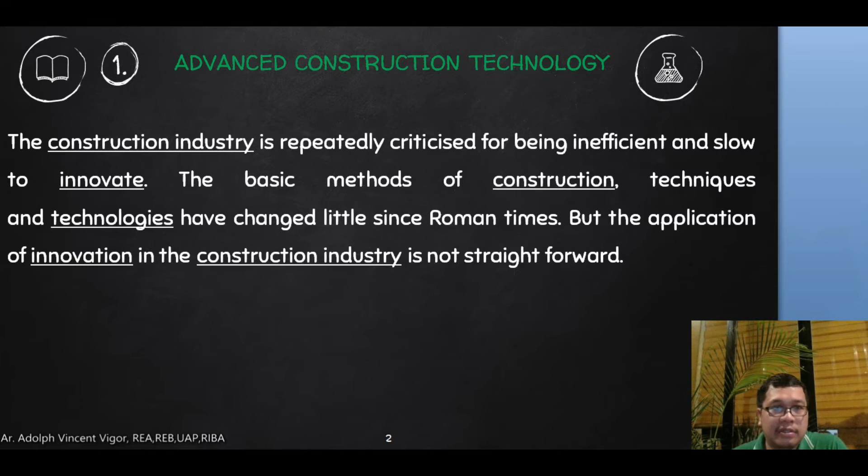Every construction project is different. Every site is a singular prototype. Construction works are located in different places and involve the constant movement of personnel and machinery. In addition, the weather and other factors can prevent application of previous experience effectively.

So what this means, class, is that each and every project is unique. Building a project in a certain location doesn't mean the factors are the same as a different location, because every site is different. There might be a difference in topography, in how you source materials, in weather conditions, and also in soil conditions.

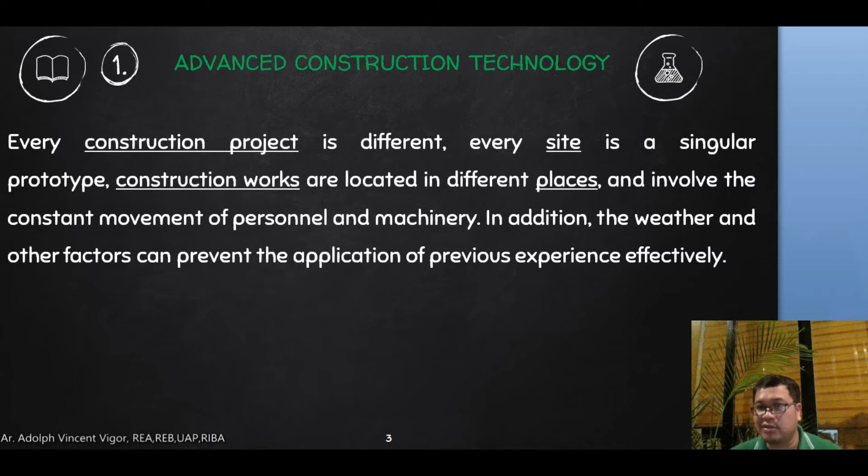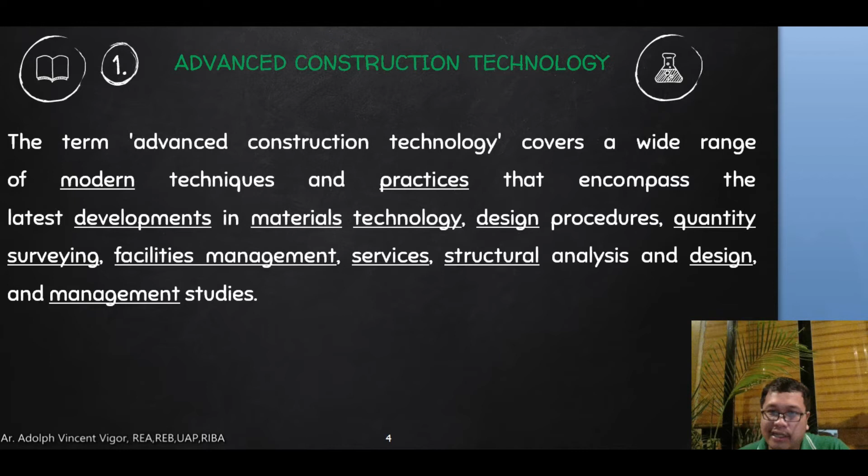The term advanced construction technology covers a wide range of modern techniques and practices that encompass the latest developments in materials technology, design procedures, quantity surveying, facilities management services, structural analysis and design, and management studies.

Incorporating advanced construction technology into practice can increase levels of quality, efficiency, safety, sustainability, and value for money. However, there is often a conflict between traditional industry methods and innovative new practices, and this is often blamed for the relatively slow rate of transfer within the industry.

Can you think, class, why there's a conflict between traditional industry methods and innovative new practices? For me, I think the reason is that those who are already used to traditional industry methods have a hard time adjusting to different methods. I think this is the primary reason why there is a slow rate of technology transfer in our industry.

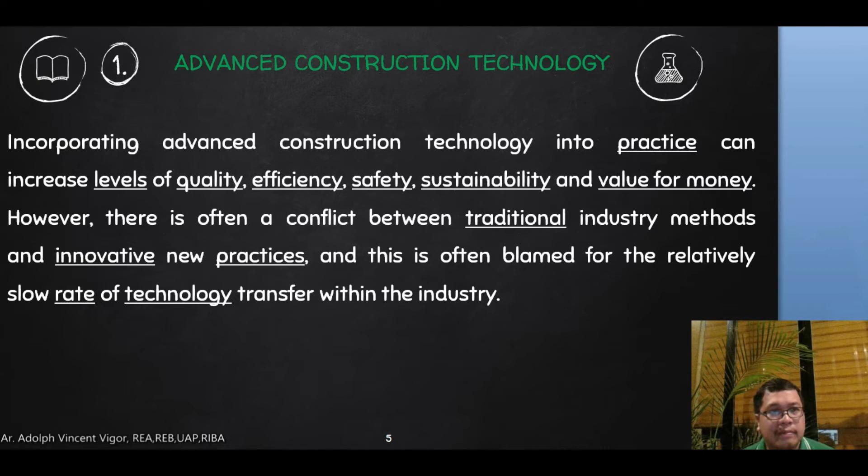The adoption of advanced construction technology requires an appropriate design, commitment from the project team, suitable procurement strategies, good quality control, appropriate training, and careful commissioning.

This means that when you design something, class, you have to take into account what appropriate construction technology you're going to use. Make sure you already have an idea in mind when you design. Then, of course, it requires commitment from the whole project team. If they're not committed to using that particular technology, you're going to have a lot of resistance which will hamper your progress. Then you need suitable procurement strategies, because some materials might be available on a certain site but not available on another.

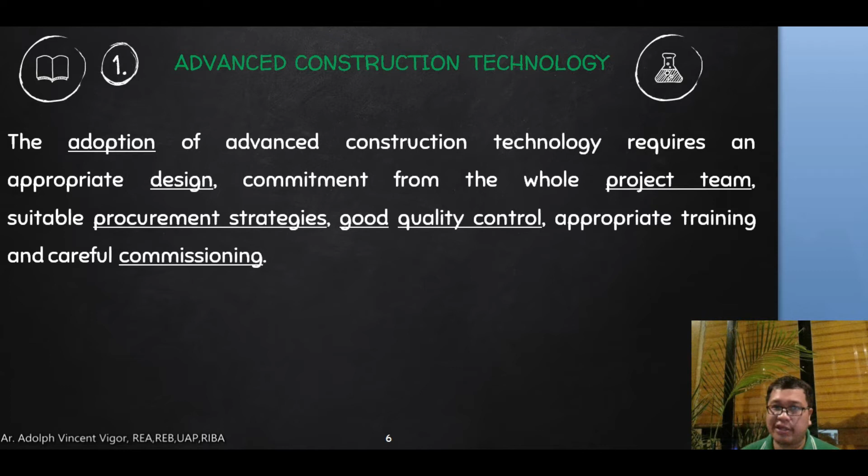Then you have to have good quality control, appropriate training, and careful commissioning.

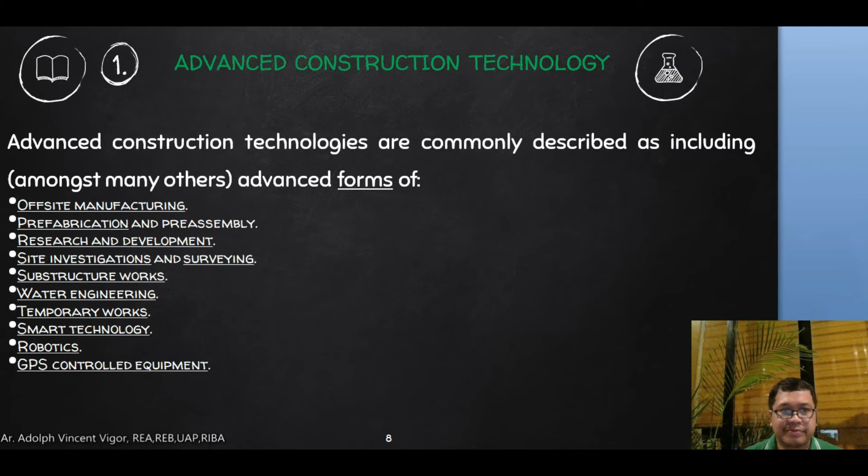Advanced construction technologies are commonly described as, amongst many others, advanced forms of 3D printing, materials, building information modeling, cladding systems, computer-aided design, computer-aided manufacturing, computer numerical control, construction innovation hub, construction plant, modern methods of construction, modular construction, off-site manufacturing, prefabrication and pre-assembly, research and development, site investigations and surveying, substructure works, water engineering, temporary works, smart technology, robotics, and GPS control.

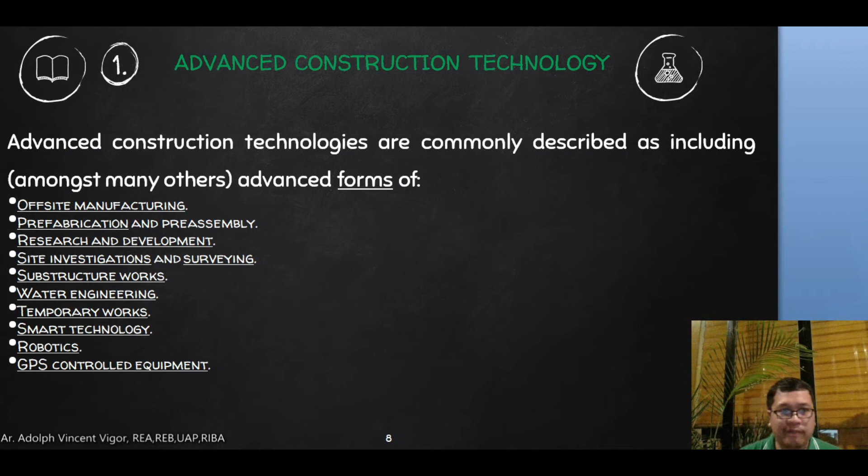When you use 3D printers, class, I think it increases your creativity also, and the kind of structure you're going to produce, because human workers have limitations with their skills. But if you use 3D printers, since it is guided by technology and robotics, it will be easier to do more complex shapes, which gives you more creative freedom, and you can create shapes that are impossible to build with human hands.

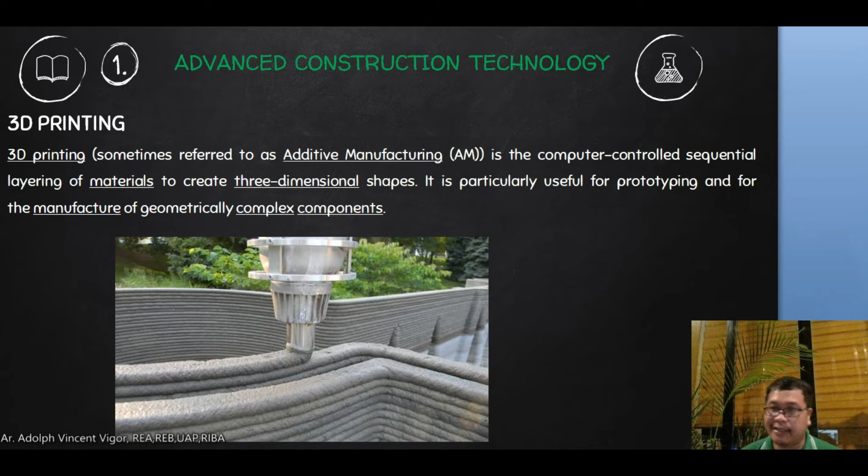In the construction industry, 3D printing can be used to create construction components, so you can print different components or print entire buildings. I've heard that in China they're able to print entire buildings. This is something I hope will be adopted in our country as well.

Construction is well suited to 3D printing, as much of the information necessary to print an item will exist as a result of the design process, and the industry is already experienced in computer-aided manufacturing. The recent emergence of building information modeling in particular may facilitate greater use of 3D printing.

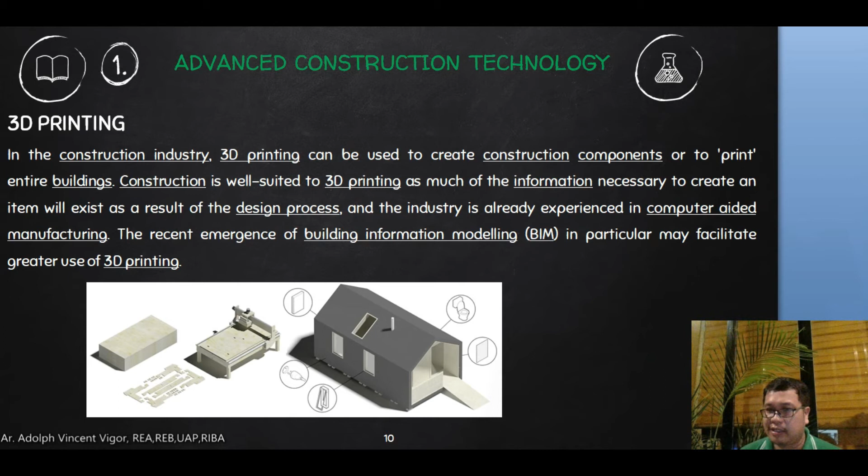Since you're already in your third year, you're already well versed with computer-aided design, drawing, and drafting technologies such as Lumion, AutoCAD, and 3ds Max. When you talk about BIM, you use information to build your building. So when you design the building, you could already generate its project management data, generate the bill of quantities, the bill of materials, and your drawing sheets, which is really great. I think that is the future also, and it would make planning more efficient and more accurate.

You also have this term, which is cladding. I think a lot of you are already familiar with it. This example class is a building in Riyadh, a library building. I've seen it once, twice, or thrice when I went to Riyadh a few years back.

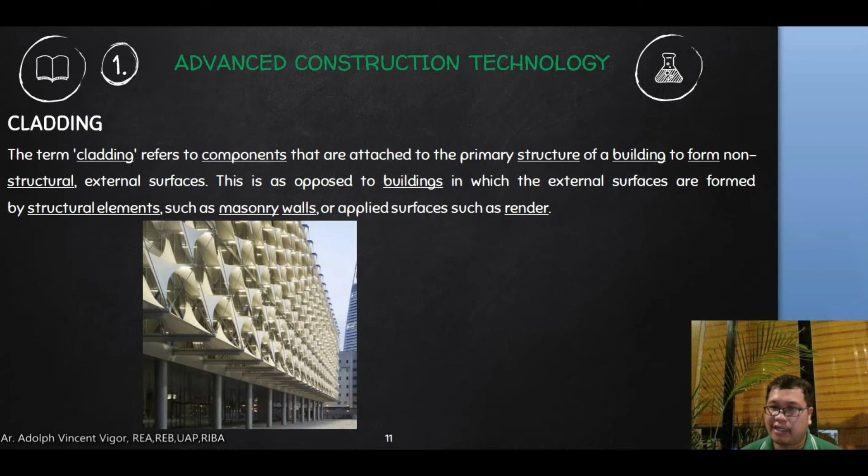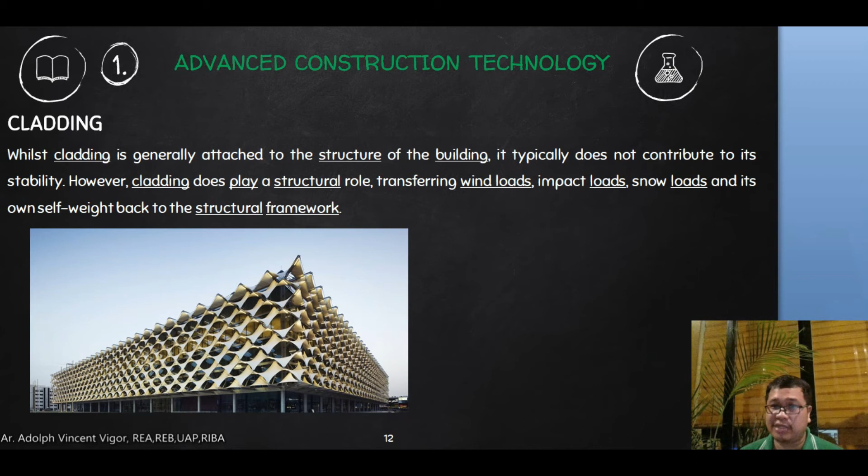The term cladding refers to components that are attached to the primary structure of a building to form non-structural external surfaces. In this case, that building has tensile structures attached outside, which really looks cool because it creates some sort of three-dimensional depth for the building. While cladding is generally attached to the structure of the building, it typically does not contribute to stability, and it only plays a structural role transferring wind loads and its own weight to the structure.

Then we also have the modern methods of construction. I think this will be our main focus for this course. We'll discuss them in greater detail in the next weeks.

Since the Second World War, there has been a desperate need to deliver new housing quickly. Modern methods of construction, MMC or smart construction, has been promoted as a way of working more effectively to achieve more without using more. It centers around the use of off-site construction techniques that can benefit from factory conditions and mass production techniques. So basically, class, the term means that you manufacture components of a building off-site, and then assemble them back on the site.

I think this is much faster because you'll have a lead time when you finish your designs. You can already use management techniques, just like what you do in factories, to manufacture each component. Then you transfer them all and build them at the site.

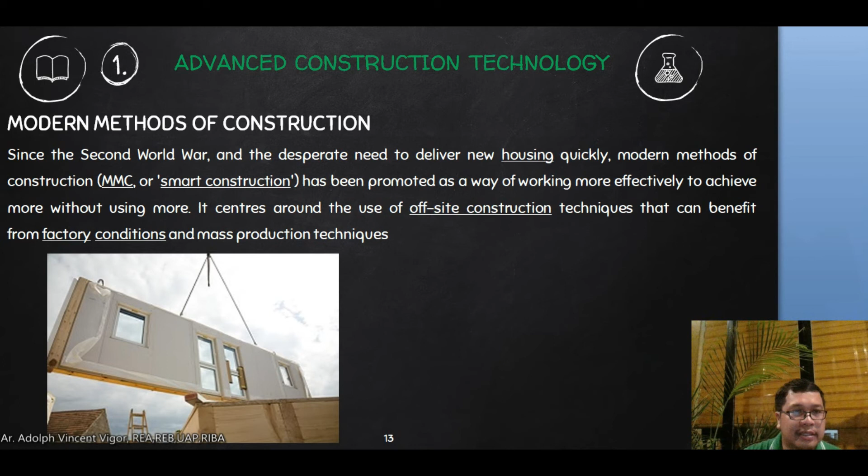Then let's move to robotics. Advanced technology is changing the construction industry. The proliferation of construction technologies is having an impact on everything that is digitally connected.

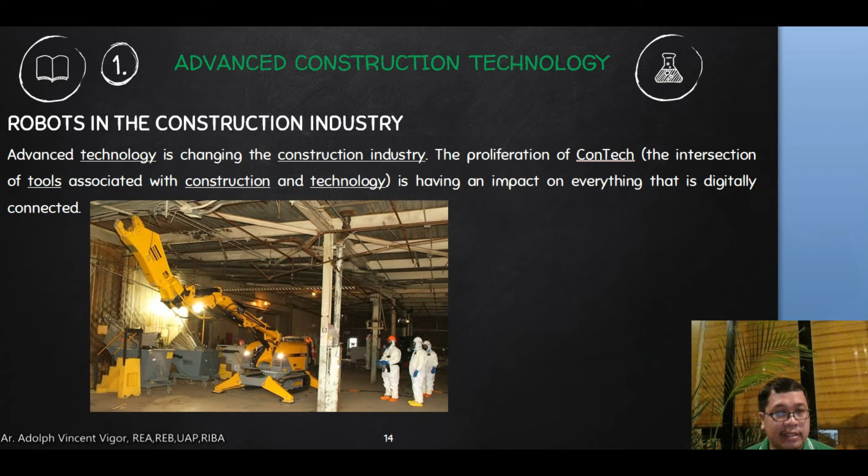The primary advantage of robots is that you can reach places which are dangerous to humans, and you can also produce more accurate components. As technology becomes more advanced, cheaper, simpler to use, and more efficient, its adoption is gradually increasing. This is particularly true in the case of robotics, which relates to works executed by automated machinery. It's a form of ConTech typically used for repetitive tasks, dangerous tasks, heavy lifting, and so on.

So if you have repetitive tasks in your project, it is much better to use robots. And if there are tasks that are too dangerous for human beings, you can send robots instead. You can also use them for heavy lifting and so on.